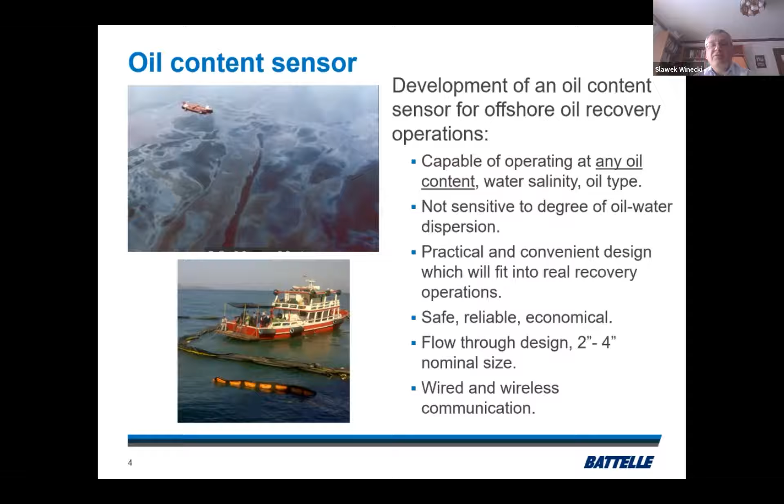Clearly it needs to be a device which will measure any oil content from almost no oil up to almost pure oil and everything in between. It should be able to work with seawater, and it should work with different oil types. It should also not be sensitive to the degree of dispersion between oil and water. Sometimes we may have emulsions, and the sensor should be able to handle them. And of course, it should be safe, reliable, economical. BSEE requested that the sensor should be built as a flow-through pipe with 2 to 4 inches nominal size. And also it should have wired and wireless communication capabilities. We can move to the next slide.

This is getting a little bit technical. Let me try to explain why so-called dielectric measurement is not sufficient. In a dielectric measurement, we examine a material, in this case a mixture of seawater and oil, as a capacitor. So if you imagine this pipe going in or out of the slide, by the way, I think we advanced to the next slide. Oh yes, this one. Inside of a pipe is a mixture of seawater and oil, and two metal electrodes are applied from outside. And if one looks at the equivalent circuit of this, the cavity filled with the water-oil mixture acts as a capacitor connected with a resistance.

For typical geometry, let's say a 4-inch pipe and properties of seawater, you may expect capacitance differences of the order of 10 picofarads. This is absolutely fine. Electronic circuits can measure picofarad changes. The problem is if the mixture is conductive, if it's mostly water, this resistor connected in series with this capacitance has a very low resistivity, approximately 10 ohms would be typical.

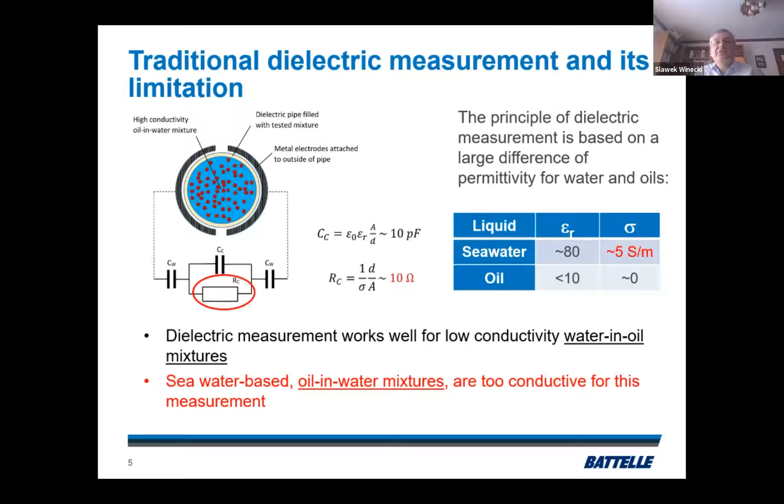One common implementation of a dielectric sensor is to use a resonance circuit and detect the resonance frequency. It's what we did in a lab. We had these two electrodes attached to the pipe. It was an external capacitor and an inductor. Values were selected to have a resonance in a megahertz range or a multiple megahertz range.

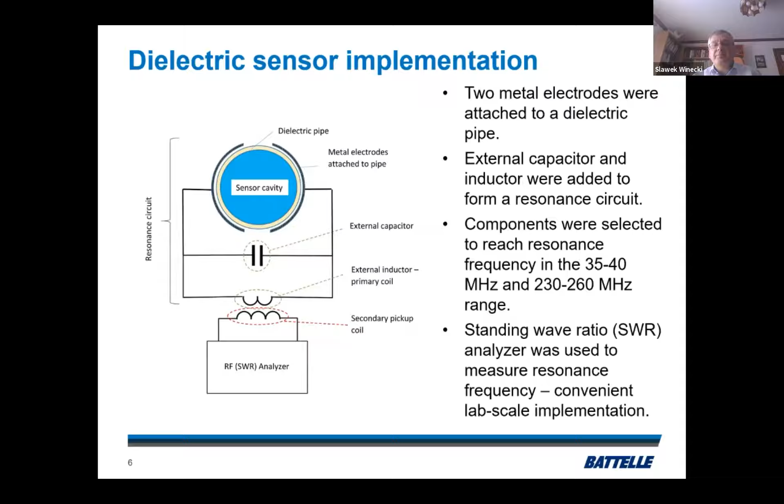And we used a device called a standing wave ratio analyzer. It's a very low cost device which is commonly used to tune radio antennas. This electronic implementation is not really suitable for a commercial unit. It's just very convenient in a lab. Why don't we move to the next slide?

This is how we generated a mixture of water and oil in a lab at Battelle. We had a vessel constructed using 4-inch PVC pipes. It was really a closed loop. It could be refilled from the top with oil and water at different ratios. Therefore, we really knew what's the oil content for this mixture.

Once the vessel was filled, we introduced mixing. At the top in the middle, you can see a little bit of a motor. It's a variable speed motor with a long shaft and a propeller immersed in the center in a pipe of the vessel, the white pipe on the right side. This propeller generated both flows, a kind of recirculation throughout the loop, and also dispersion of oil in water. We adjusted the RPM of this mixer to test different mixing effects.

Our sensor is shown on the left side. It's this blue-black device. The nominal size was 4 inches diameter, approximately 24 inches long. Electronics was connected with a laptop computer shown, so we could collect all the resonance frequencies and test different algorithms on this laptop.

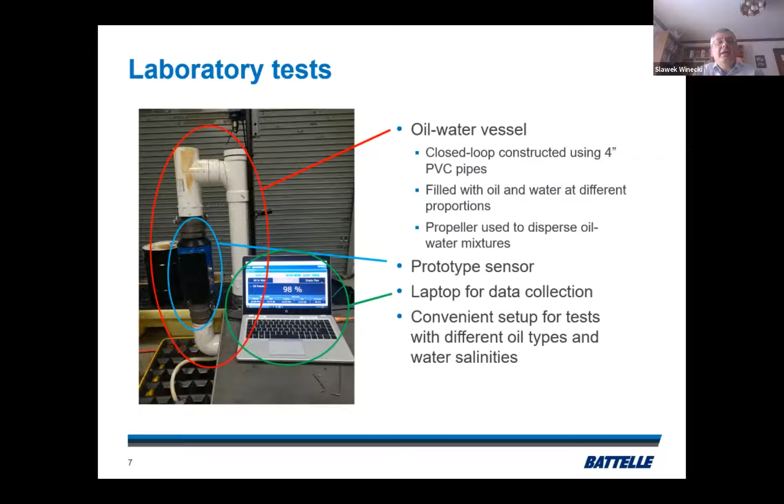One comment, you notice that this device excludes air from a mixture because our first version of a sensor, this one, requires that we don't have a significant amount of air. This was a limitation for our phase 1 device. Let's go to the next slide.

This plot shows essentially the failure of a dielectric measurement for mixtures which are conductive. Let's focus on the plot on the left side. We have a resonance frequency for a dielectric sensor as a function of oil content. You can see as long as the oil content is 70% or above, we have a nice kind of a straight line under an angle. This is a region where the dielectric sensor measurement can give you information about oil content.

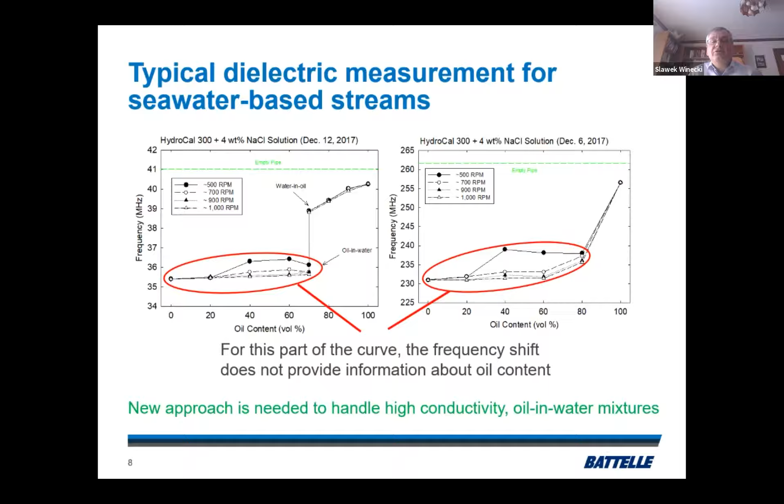However, if it's less oil, less than 70%, the resonance frequency is essentially constant, changes a little bit with the mixing properties. You cannot use these measurements to measure oil content. Theoretically, this should get better at higher frequency. Therefore, we also tested this concept at above 230 megahertz. The bottom line is really things are not improving. So a new approach is needed to handle high conductivity oil-water mixtures. Why don't we move to the next slide?

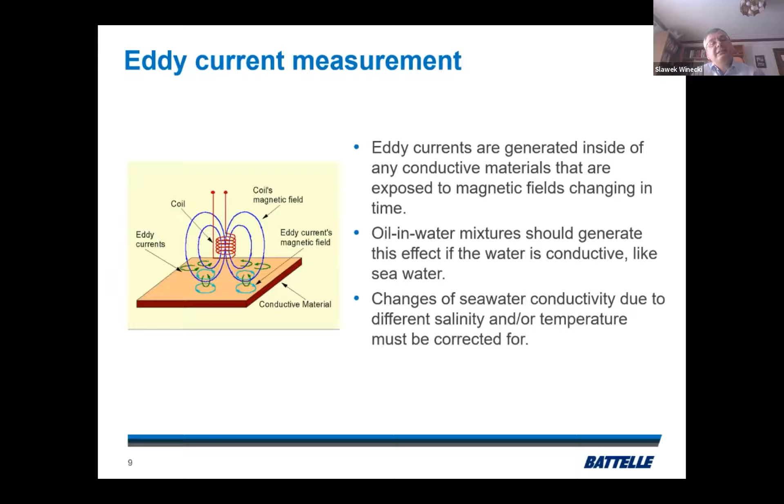We were successful using an eddy current measurement. From elementary physics, you know that eddy currents are electrical currents which are generated if a conductive material is exposed to magnetic fields changing in time. So our idea was to use this as a method to measure how much oil is suspended in water. The idea is if you have more and more oil, the conductivity of seawater should be reduced. Therefore, we will have less of an eddy current. Why don't we move to the next slide?

So the implementation of eddy current was, again, we built a resonance circuit. It was an inductor. It had the form of a single copper wire going around a 4-inch pipe. It was connected with an external capacitor. We selected this geometry because it provides a resonance frequency of approximately 15-22 megahertz. Secondary coil, again, a single loop going around the pipe, about 1 inch away. It was connected with the SWR analyzer. Let's go to the next slide.

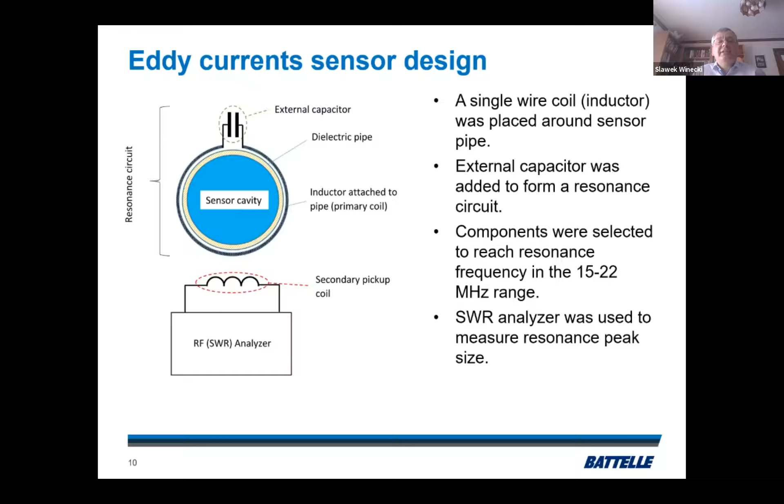So these 2 plots show results of both experiments. On the left side, eddy current, on the right side, dielectric. Both were carried out for a mixture of Hydrocal 300 and water containing 4% of sodium chloride. The point is, these measurements are complementary, and it's very easy to develop an algorithm. So the algorithm goes as follows.

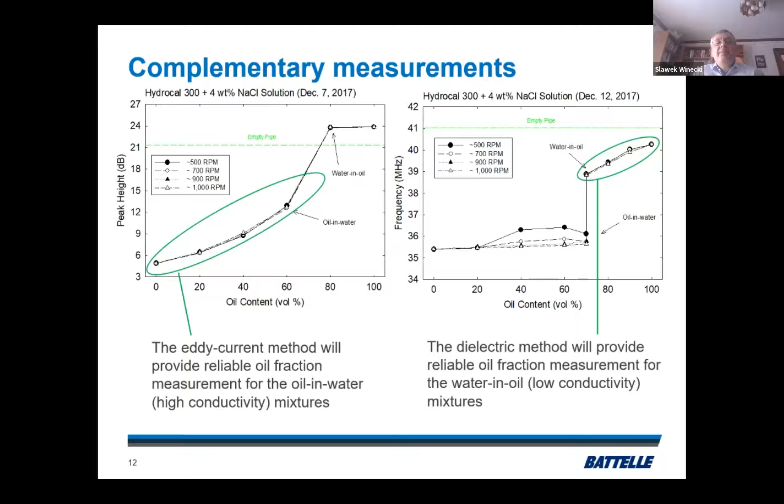This is what you get using this simple concept. So this plot is a correlation plot. The horizontal axis is the true oil fraction. It's based on the amounts of oil and water we introduce into our apparatus. And the vertical axis is what we got from our sensor.

We tested 4 types of oil, 2 refined oils, Hydrocal 300 and Calsol, and they have a different viscosity, and also 2 crudes. We used the Hoops and the Pacific Energy. All of this was done for 3 values of salinity, 2, 3, and 4 weight percent. Well, it's not an ideal measurement, but we claim it's quite good, particularly for this application.

The correlation coefficient is as high as 99%. The average error is 3%. It's an average deviation between these experimental points and the ideal diagonal line shown here. The maximum error is plus 12%, minus 10% in absolute value. So somewhere there are points 12% above the diagonal and 10% below the diagonal. Not ideal, however, we believe for oil recovery applications this can be very useful information. Let's go to the next slide.

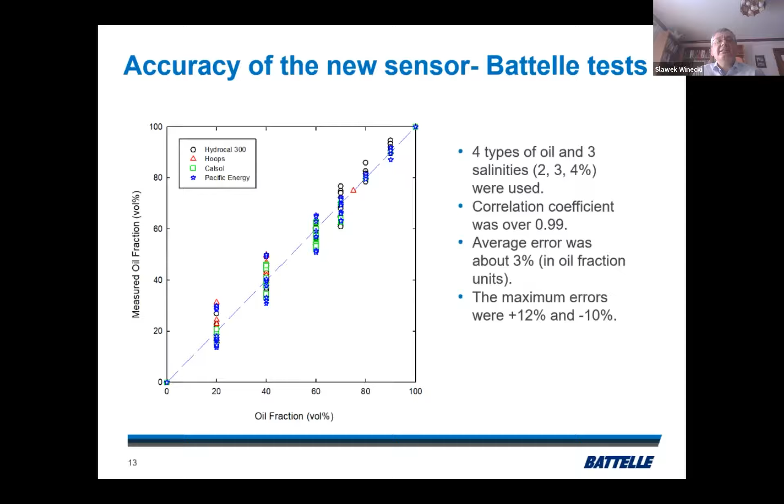So the previous slide was laboratory data. We went to OHMSETT to test our sensor. We have a couple of pictures. You see a picture on the right. The OHMSETT technician is adjusting some connections on top of our sensor. It was mounted vertically, and testing was done in the summer of 2018.

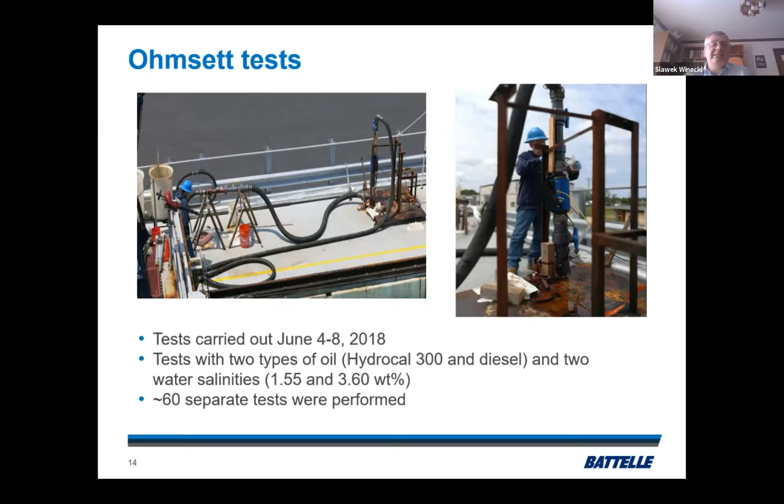We tested 2 hydrocarbons, Hydrocal 300 and diesel fuel. Both were tested with water with 2 salinities, 1.55% and 3.6%. Over 5 days, approximately 60 mixtures were tested. We can go to the next slide.

So this is again a correlation plot using all OHMSETT data. And the correlation coefficient was slightly lower, 0.96. The average error, 6.1. The maximum error was 21%. There is one red data point at a 70% true oil fraction.

Well, overall, we believe it's still very good accuracy for this application, specifically because there is currently no device able to measure oil fraction in a flow-through real-time setting.

From the discussions with BSEE, we understand that really what we are competing with here is a kind of visual evaluation of a stream. If a stream appears to be viscous and black, it's most likely oil. If a stream is less viscous, lighter in color, it would be a lower amount of oil. We welcome this competition. We believe our device will provide much better information during oil recovery.

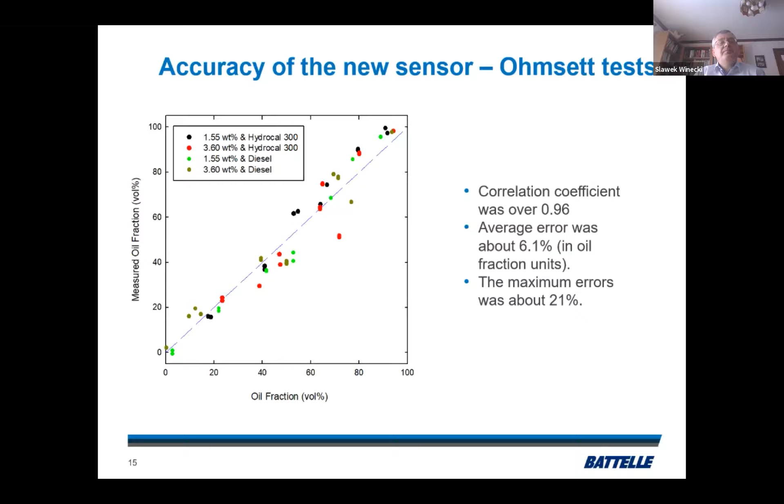Why don't we go to the last slide? Yes. So this is our second version of a sensor. It works slightly differently. It's being developed. We plan in the next 2-3 months to go to Ohmsett to again test it. And this is really intended to be tested in an industrial setting somewhere, perhaps the Gulf of Mexico, perhaps Alaska.

The major improvement in capability is that this is a 3-phase sensor. It will account for air in a pipe, and it can measure really a mixture of oil, water, air. It's designed to operate horizontally, to be connected with hoses on both ends. This sensor will have wireless and wired communication. For wireless, we use the frequency of, I believe, 915 megahertz, which is effective in a marine environment. It's not trivial, as you know, to have radio communication close to the sea level.

It will operate from -25 Fahrenheit to plus 120 Fahrenheit, so a very broad temperature range. The sensor will only take half a watt of power. So actually the tablet, which would provide output to the user, will take much more power. The sensor by itself will operate for a much longer time on a lithium battery.

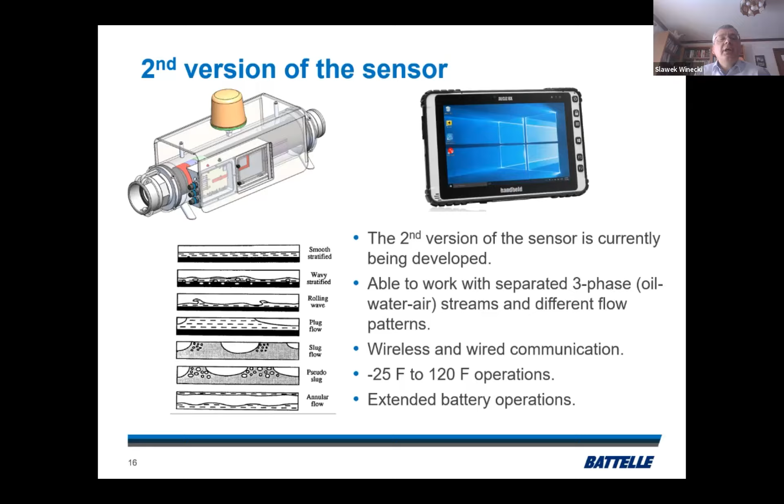And I have an acknowledgement slide. So this work was sponsored by BSEE, phase 1, starting in 2017, ending 2018. It was BSEE project 1083. The current project started in October 2019. It will end in midsummer, basically. This is BSEE project 1119.

If you'd like to learn more about this phase 1 sensor I described today, we published a journal article. It's published in the journal Sensors and Actuators A: Physical. Title is Improve Oil Recovery, 2019. We have 3 patents. The first patent really covers the phase 1 sensor I described today. 2 additional patents really address and protect the second version of the sensor. This is all I have.

Thanks, Dr. Winecki. I have a question to start. So sorry if you covered this in the first few slides of your talk, but do you foresee that background noise would be generated from something like suspended sediments or algae in environmental systems?

I think based on how the sensor works, it will kind of look at the water versus oil content. If you have some bioorganism inside of a cavity, the sensor will really evaluate, is it mostly water or is it mostly oil? If you have a fish inside, I don't know if it happens. You may have a few % of water, and the sensor will evaluate whether there is some oil in this. And this approach is known to measure fat content in the tissue of animals and people. So algae, I think algae will be seen mostly as water. I don't think there's much fat or oily substance in the algae. Maybe I'm wrong. Excellent, thanks.